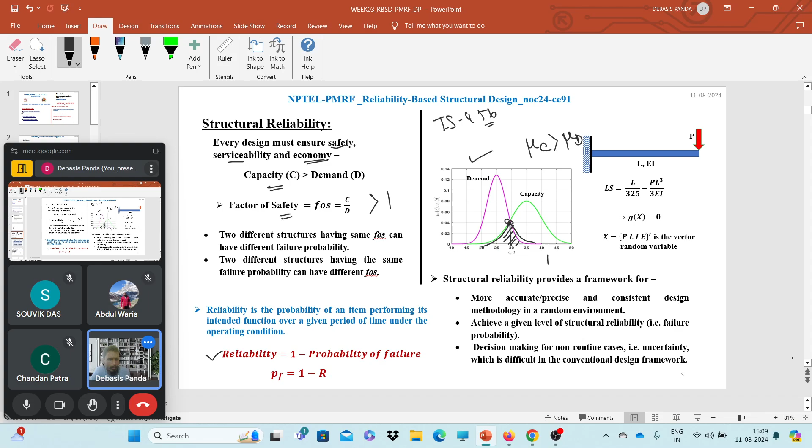If you went through your video lectures, the course instructor already explained the levels of safety checking and risk assessment formats. Level 1 deals with the deterministic approach, like what we learned up to undergrad courses. We have some codal provisions, and according to these we design. In general, what we do is overestimate the load and underestimate the capacity.

Recall that factor of 1.5 for dead load and live load combination, meaning we are overestimating it. And for the factor of safety for material, if we consider in limit state, for concrete it's 1.5, so we reduce the capacity and increase the demand, so that the uncertainties related to demand are counteracted by the reserve strength coming from the factor of safety.

In level 2 reliability, what we generally do is formulate some limit state function based on some elements. We break down the structure into element level or different component level. Then we formulate the limit state, and in the limit state, we model the uncertainties and solve for the probability of failure, and we get the reliability.

And in the third level of safety checking format, it's precise modeling. As a whole, we model the structure like FE modeling or other kinds of modeling. We will see this later on in this course.

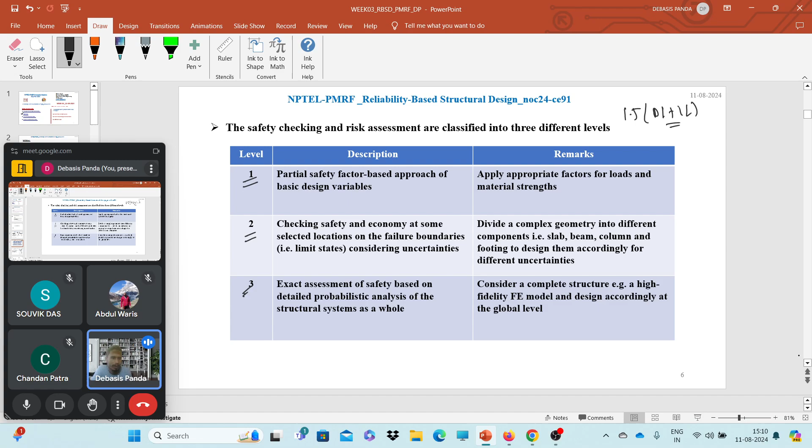First, what we need to understand is the concept of limit state, and then we can move on to how we can use the limit state to quantify the uncertainties and find out the reliability and probability of failure. So let's consider this steel beam, which has a cross section.

From the cross section we have the parameter I, from the material properties we have E and L, and an external load P is applied on the free end. So what will happen? The beam will undergo deflection.

Now, if we want to design with respect to serviceability criteria, the serviceability limit state says the maximum allowable deflection should be L by 325. That means L by 325 is nothing but your capacity.

Now, what will be the demand? Due to that external load, what will be the maximum deflection at the free end? It's PL cube by 3EI. So this is your demand.

Now, how to formulate the limit state? Limit state actually is nothing but the capacity minus demand, made equal to 0. So your limit state, Gx, contains both the capacity and demand information, right? C minus D equals 0. So for this cantilever beam problem, we can easily formulate the limit state function.

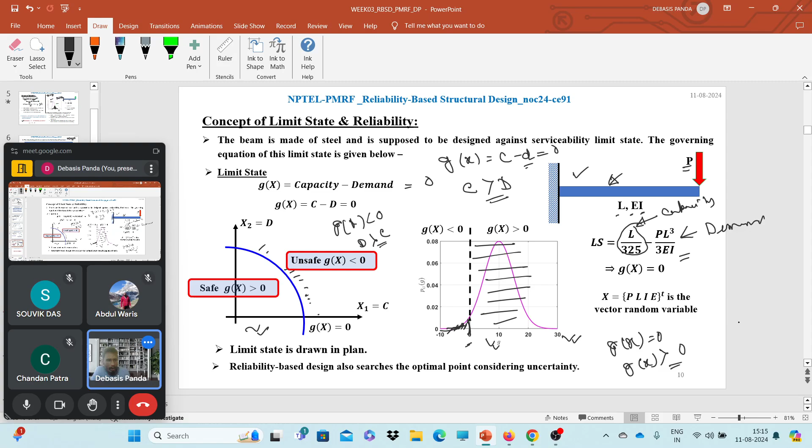So now think about it. We have the limit state, g of x equals capacity minus demand. Now, if we can find out the first two moments of the limit state, let's see if having these two moments lets us define the failure probability or the reliability. First task: let's see, if we have the two moments, we already know about the moments of the random variables. Recall the variance algebra, where if we have a function of random variables, we can expand it with the help of the Taylor series.

So if we have the limit state, first step is we have the limit state, that is c minus d equals 0. Now our task is to expand the limit state with respect to some point.

Say for example, for x star point, we expand the limit state with help of the Taylor series expansion. Now, if we consider that the reference point is mean, that may not be the case for all random variables, but let's take that mean is the reference point for our case.

So if the mean is the reference point, we can find out the mean of the limit state function as nothing but E of g(x), that means g of the mu points or mean points. And if we truncate the series up to the first order, we will get the sigma square also. So we spend time on variance of algebra, how to find out two moments. So from the variance of algebra and using Taylor series expansion, considering the mean as a reference point, we can have the first two moments.

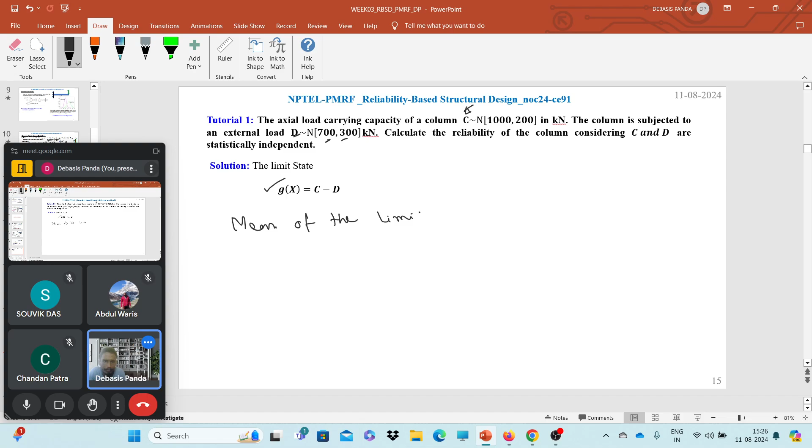So it's a linear function. What will be the mean value of the limit state? Mu g will be nothing but mu c minus mu d. The mean value of capacity and demand is already given: how much? 1000 kilonewton minus 700 kilonewton, that means 300 kilonewton.

Now what do we need to find out? We need to find out the second central moment, that means your variance. So variance of the limit state, that means sigma square, or you can directly write down standard deviation and the square root of the right hand side portion.

So it's again a linear function. What will that be? Mu c square plus mu d square - sorry, sigma c square and sigma d square. So we have the sigma values: 200 square plus 300 square.

So how much is the value you are getting? Tell me. Just give me the sigma value. Sigma will be the square root of 300 square plus 200 square. Just calculate it. Under root of 300 square - how much is coming? 360.55. Okay.

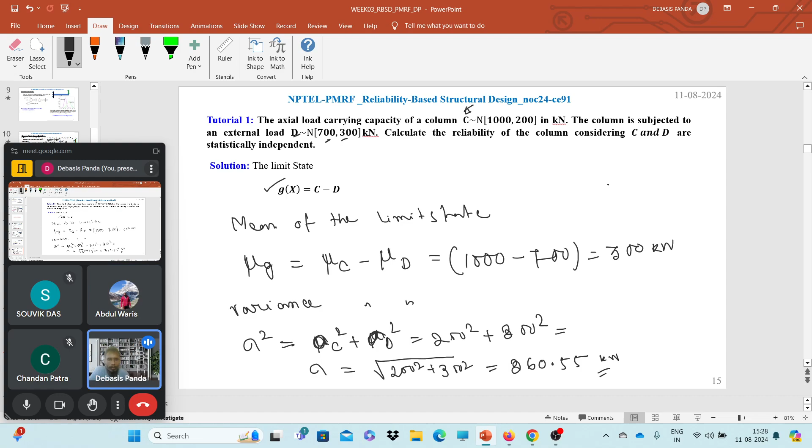200 square plus 300 square. So we have mu and sigma both. Now what do we need to do? We need to find out the beta reliability index. What will be the beta value here? Calculate it. It's nothing but your mu g by sigma g, right? So 300 divided by 360.55, and it comes to 0.83.

Now you can find out the probability of failure. Probability of failure will be nothing but phi of minus beta, that means phi of minus 0.83. Now, from where you can get the value? Look for the standard normal table, or you can directly solve it through the calculator. So let's go to the standard normal table, as we don't have a calculator within us during the final exam.

So we have to rely on the standard normal values, which will be given. So we need to look for minus 0.83, right? So here minus 0.8, and we need to go up to the point here, 0.83. So the value is nothing but how much? 0.2033, right? So from the standard normal table, we are getting the value as 0.2033.

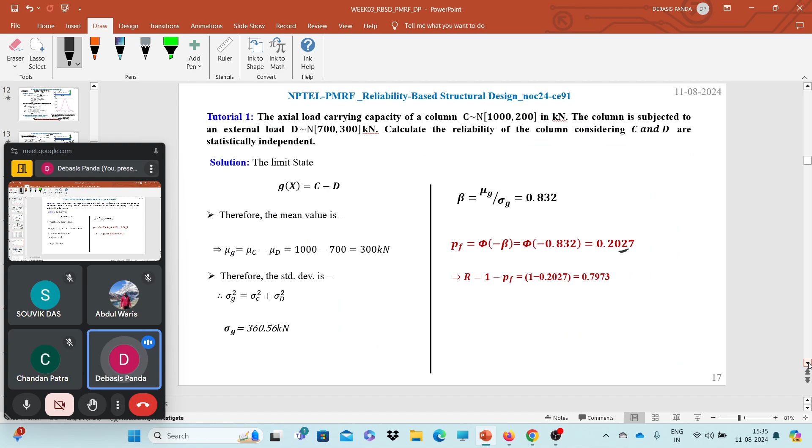Now here for this example, there was no correlation between any of the variables. If there was any correlation, then we need to also encounter that or consider that correlation within our problem.

Yes. Actually, I have a question in the next slide. Can you please move the slide? The formula for sigma square, actually. Sigma square G. We are using sigma square P, sigma square L, and sigma square E in each of the terms. But does it appear in the formula that we just saw in the previous slides?

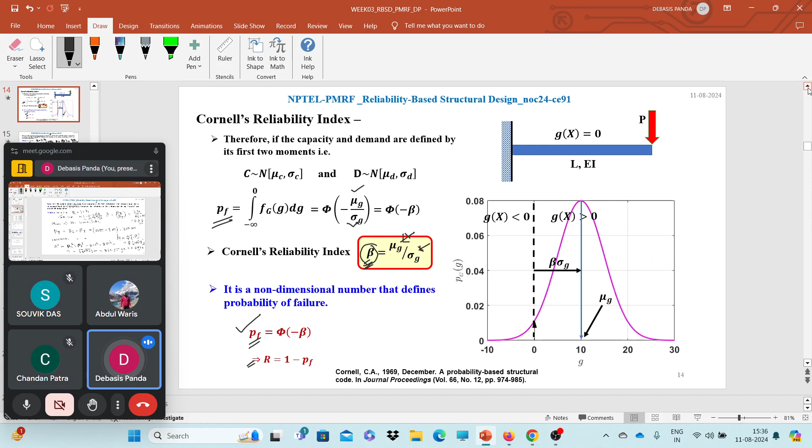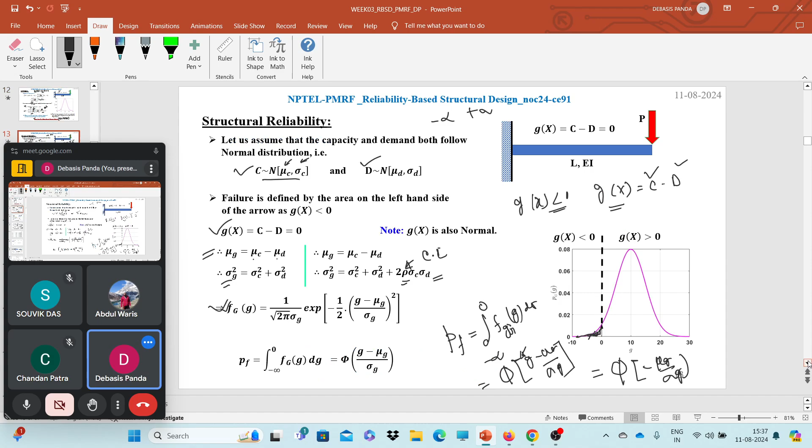Thank you. Okay, so let's solve this problem. But I suggest that you should go to those videos where we have solved the problem related to this correlation coefficients. So we will see in a minute also.

So if you put all these values here, you will get that your standard deviation will come as 0.7843. Clear? Now we have the mu value. Mu of g is equal to 3.1146, and sigma g is equal to 0.7843. Now you can calculate the beta value, it's nothing but that ratio.

3.9712. Now once we have the beta value, we can calculate the PF, probability of failure. Probability of failure will be nothing but phi of minus 3.9712.

Now check and give me the value if you are getting this value using a calculator or not, because in your standard normal table, the value of 3.97 is not provided there. Like if we go to the standard normal table, 3.4 is the last value which is provided. Behind that we will have less probability of failure. That's why. But if this kind of problem comes, then the values will be provided to you.

Now use your calculator and give me the value. Do you know how to use the calculator to find out that phi value, Abdul?

Not particularly, I use MATLAB for it usually. Yeah, you can use MATLAB. Obviously MATLAB is well and good. But if you have...

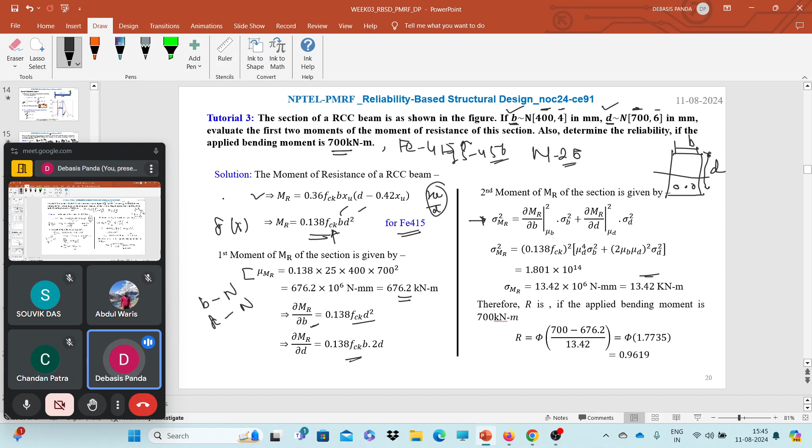Now think about it. We have b that follows normal distribution, we have d that also follows normal distribution. We have found out g of x, that means our limit state function. For the limit state function, we have found out that the mean of the limit state is that, and standard deviation of the limit state is that. Now the question asks, if the applied bending moment is 700 kilonewton, determine the reliability.

So if I want to plot that g of x, we cannot use MATLAB right now, otherwise I can plot it there. So for example, we can visualize the things here, our mean value is somewhere here, and that gives 676.2 kilonewton meter, and we have a normal distribution, that means a bell-shaped curve. And the standard deviation also we have found out.

676.2 is the mean value. We need to find out the reliability with respect to the bending moment of 700 kilonewton. So the point 700 kilonewton will lie here. What will be the reliability portion? Obviously this part, because when the value of applied bending moment is greater than 700 kilonewton, we will get the failure region.

So for this problem, what we need to do is just integrate this limit state function up to our failure criteria. That means we can easily have it from the standard normal table. So phi of 700 minus 676.2 divided by 13.42, that comes as phi of 1.7735. What is the value of phi of 1.77?

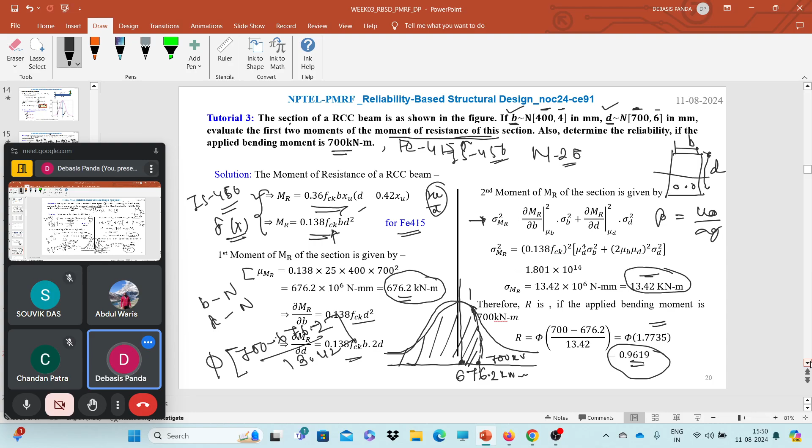Now let's solve one or two more problems. Here I have added a simple problem regarding covariance and correlation coefficients. If we have two loads, P1 and P2, applied on a beam, the mean of P1 and P2 are given. Say for example, we have a beam, P1 and P2 are given.

Now the mean of P1 and mean of P2 are also given. The question says they are correlated with a correlation coefficient equal to 0.7. Now find out the covariance.

From the properties of variance and covariance, we can conclude that the correlation coefficient between two random variables is nothing but the covariance between them divided by the standard deviation of P1 times the standard deviation of P2.

Now you have the rho value, so you can find out the covariance of P1, P2 is equal to rho 1 2 into sigma P1, sigma P2. Just put in all these values. The correlation coefficient between the two is given as 0.7.

Now the mean value and the standard deviation of P1 are also given. What was the standard deviation of P1? Variance of P1 is given as 4, so standard deviation is nothing but the square root of the variance.

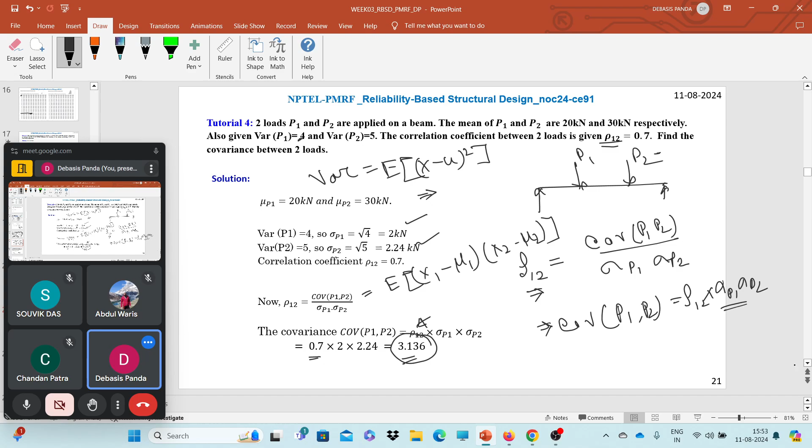2.24, right? So is the value coming to 3.136? Check it. Yeah, that is it. Okay.

So now let's solve another problem. Here, what is said - a simply supported beam. Okay, simply supported beam. Now you people solve this problem and give me the answer. A simply supported beam of length 4 meters is subjected to a self weight of UDL type.

It is given as Q1 equals this, and this follows the normal distribution with mean this and standard deviation this throughout the beam. Okay, so we have a beam, simply supported beam.

And one UDL due to the self weight is coming, right? The value is defined as Q1, and it follows normal distribution with mean this and standard deviation this. Great. And now we have, throughout the beam, a live load of point load.

Live load is given as a point load at mid span. So we have also another load Q2, which also follows normal distribution with mean and standard deviation. Great.

Now the flexural resisting moment capacity of the beam is C. Resisting capacity is given here, that is C, and that follows normal distribution of this.

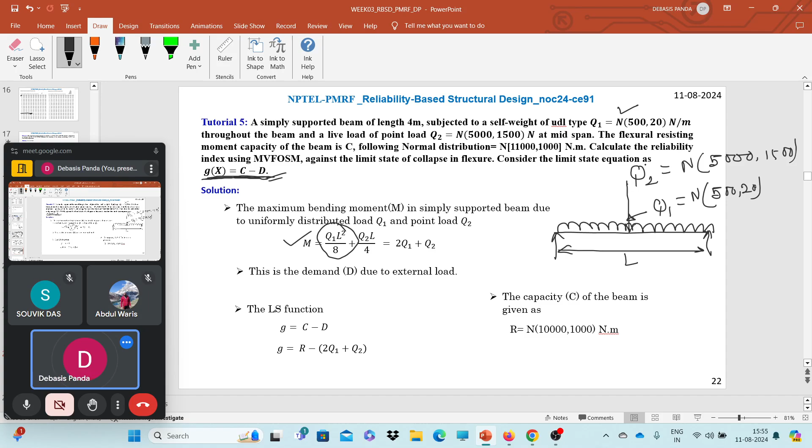Moment for the Q1 load - obviously the maximum moment due to that load will be Q1 L square by 8, and that will occur at the midpoint. Also for the point load, we will have that much of moment at the center point.

So this is the applied moment. If you solve it, you will get 2Q1 plus Q2. That means this is our... what is that?

This is our demand, yes? Due to the applied load, whatever moment we are generating within that beam, that is the demand. So we have the demand equation, and that says 2Q1 plus Q2. Now capacity, how will it change to Q1 and Q2?

The L will remain there, no? If we solve it, the L value is given, otherwise we cannot... 4 meters. Okay, fine. Yeah, got it, it's a deterministic value. So just put all these values in this and check whether this thing is coming or not. We just need to check it.

So Q1 value already given, 500 multiplied by L, that means 4 square divided by 8. What is Q2? 5000 into 4 square divided by 4 — not 4 square, it will be 4. So check and tell me if you are getting that value or not.

Don't need to provide that Q value, just simplify it with respect to L. We will solve the Q later. Are we getting 2Q1 plus Q2, or not? We are getting it. So this is our demand.

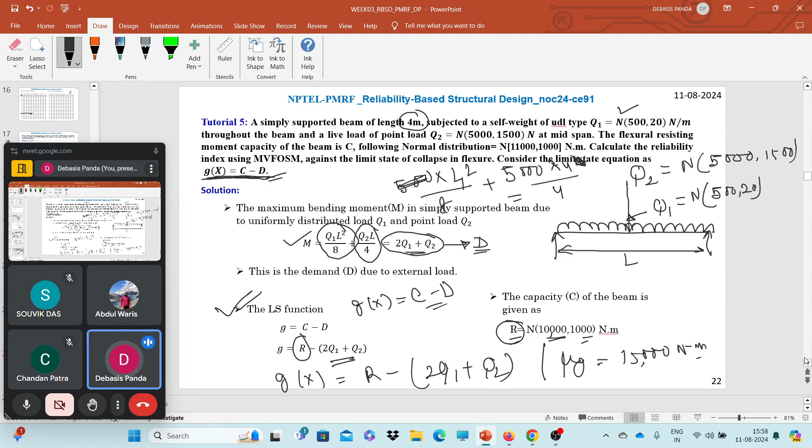Now quickly find out the sigma g. Calculate it. There is no correlation, it's a simple linear formula. Just find out the sigma g value. 1500.87.

How did you find it out? I've simply used the formula, like dow G by dow X1 kind of approach — differentiating with respect to each random variable, then squaring it and multiplying by sigma square. You just need to multiply it.

So let's see if we are getting it or not. These values are already provided. We can have the mu g, that means mu r minus this — 5 kilonewton meter. I have converted it into kilonewton meter. It will simplify it, or you can stick to Newton meter also, but at the end you should have this result.

Okay, so I'll have to recheck my results, check where I have missed the calculation, or maybe I may have missed it. So the values are given here, let's go to the slides. Okay, 500, 5,000, and 11,000.

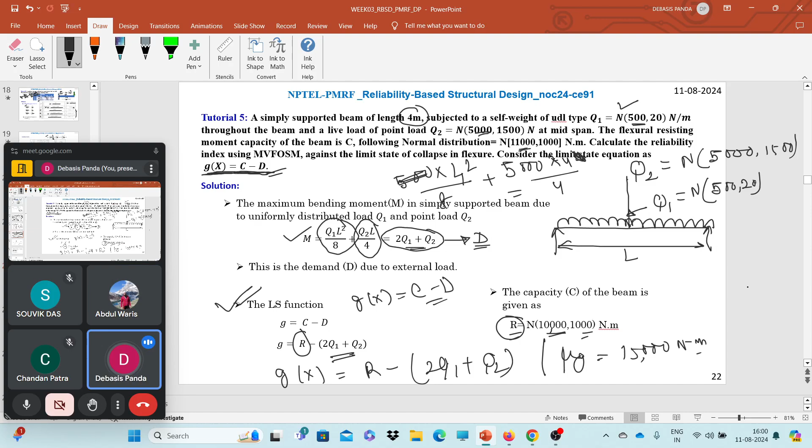If we convert them here, 0.5 Newton — Newton will be in bigger units. Just check it and tell me if you are getting that value or not. Yeah, Newton per meter is given, so already this is Newton. That means if you convert it into kilonewton, you will have 0.5. It's okay.

5,000, if you converted into that — here, okay, 5 is there, right? No problem, and mu R is 11,000. Okay, no problem with that calculation, right? 11 minus 2 into 0.5 minus 5. So it will give you — let me cross check the calculation again.

11 minus 2 into 0.5 minus 5. Yeah, okay. I've missed out the last minus Q2, I used plus over there instead. So either you will get 5 kilonewton meter or 5 into 10 cube Newton meter. Whatever, fine.

Now calculate the variance of G. Just differentiate with respect to R first, then Q1, Q2 — there is no correlation. If I differentiate with respect to R, I will get 1. If I differentiate with respect to Q1, I will get minus 2. If I differentiate with respect to Q2, I will get minus 1. It's very simple. So variance of G, just put it there — this square minus 1 square gives you 1.

Sigma R already we have, like 1. Now here del G by del Q, that is your minus 2. That means you need to square it, and Q1's sigma value, sigma Q1 times sigma Q1. Yes, this value is provided.

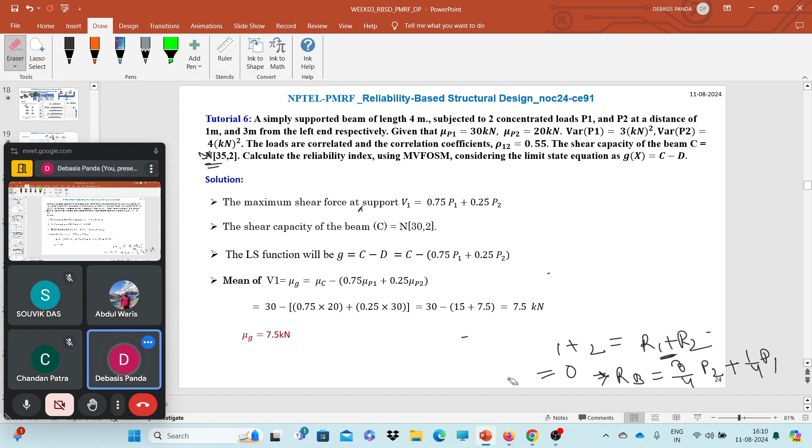Solve it and check whether my answer and your answer are matching or not. If matching, then you can directly go for the answer. Otherwise we need to figure out where the problem is.

Now tell me, if we formulate the limit state, this is our demand and this is our capacity. So G equals C minus this value. Now the value of capacity is given: the capacity follows a normal distribution with mean 35 and a standard deviation.

Now I can easily find out the mean of V1, mu C minus... maybe there's a mistake. You have multiplied 0.75 into 20, should it not be 30? Mu of P will be 30, right, and that will be 20. That's why I'm asking, just solve it.

So what is coming as mu? It will be 2.5 then. Mu will be 2.5 kilonewton.

P1 value is 3 kilonewton square. Yes, that's right, and P2 is also right. Great, so 2.5 will be there, right here. And find out the sigma value. The correlation coefficient is already also there.

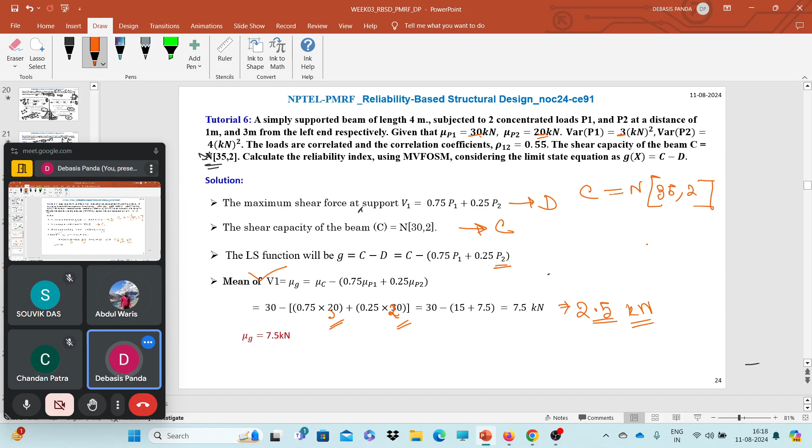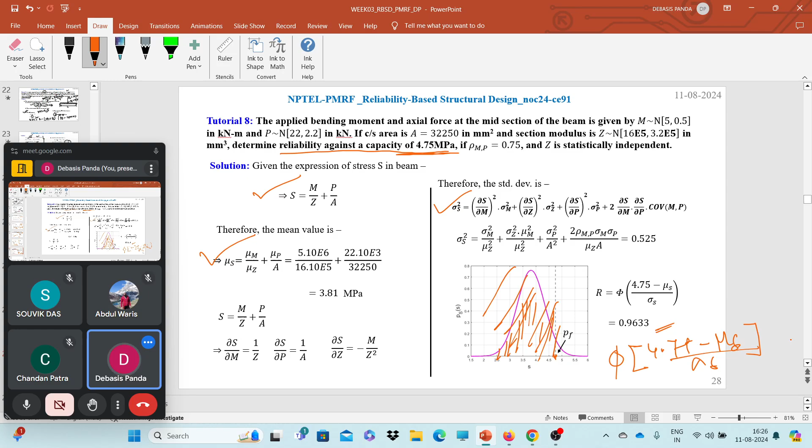So basically, till now what we have solved is how to get the probability of failure. We have seen that we can get the probability of failure if we have the non-dimensional number which we call the Cornell's reliability index, defined as the mean of the limit state divided by the standard deviation of the limit state. And the limit state we have defined as capacity minus demand.

Now, in all the questions, you have seen that the question says you should follow this format for your limit state. Now, if you don't follow this format, what will happen? We will see, and this we address as the lack of invariance problem. Now why this lack of invariance problem? I will tell you in a minute. First, check what we actually call the lack of invariance problem, right?

So let's say we have the limit state in that format, C minus D. Now if I change the format like this, that g of x equals 1 minus D by C, that means I've just divided C from here. So I can write my g of x either as 1 minus D by C, or C by D minus 1 equals to 0. These three formats, the problem will be the same, but the formation of the limit state is different.

Now, if we change the format of the limit state, our problem is still the same; we just change the format of the limit state. Now, intuitively, what comes to mind is that the reliability index should be the same for both cases. Let's see if that's the case, whether we get the reliability index in the same manner, or if the reliability index is changing or not. So let's quickly go through two important examples.

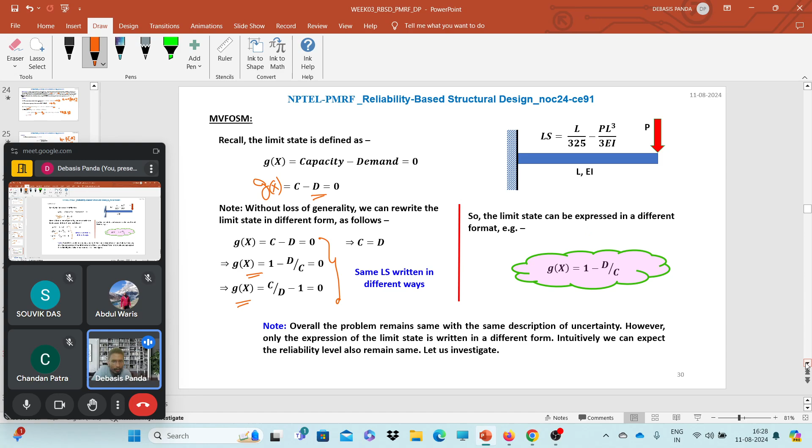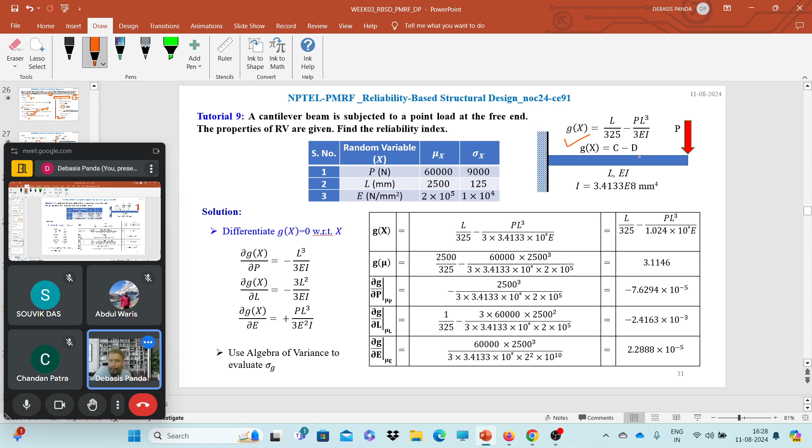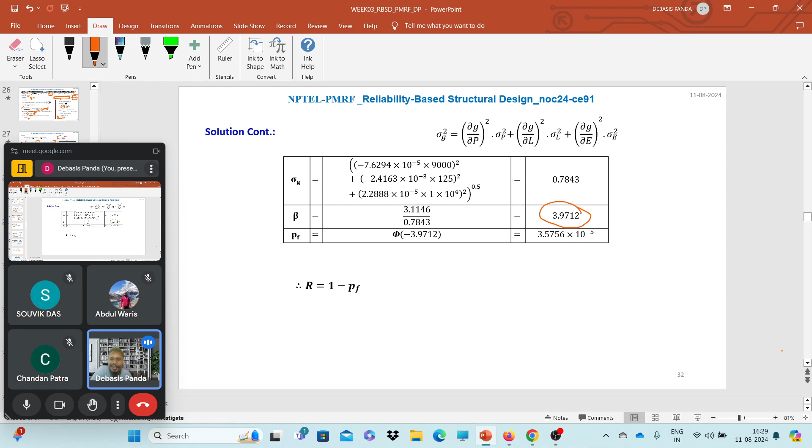We have already solved this problem, right? Where we considered the limit state in this format, C minus D, and we have seen that the beta value comes as 3.9712. We have checked the calculation on all this. We just solved this problem, yes or no? Now, if we change the format of the limit state, right...

Now I want to formulate the limit state as 1 minus d by c. Let's see what will happen. If we change the limit state again, we have that random variable associated with demand and capacity, and our limit state function was with respect to your limit state of serviceability.

That means 1 minus we will have 325 PL square by 3EI. If you solve this problem, Gx will be nothing but 1 minus that value. If we simplify, we will get the mu value. Then you need to differentiate with respect to the variables, because we have three variables, P, L, and E. So we will have three differentiations with respect to the limit state function, and the values are this.

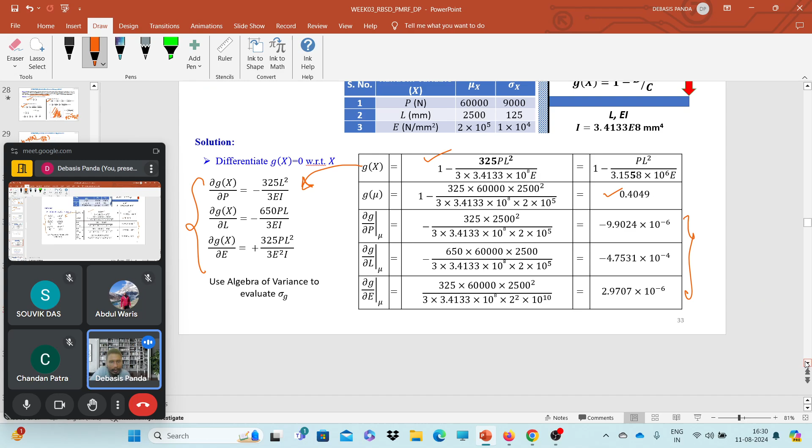You can cross check it, but first we will come to the conclusion about what we call the lack of invariance problem. So by this way, we can easily find out the value of the variance. Here, sigma g square, and that comes as this.

Now if you put all these values, you will find that beta is coming as 3.6412. On the previous problem, we have seen that beta was coming as 3.9773. For the first problem, we considered the limit state as capacity minus demand. Now for the second case, what we have changed is just the format of the limit state. We just use Gx as equals to 1 minus d by c instead of capacity minus demand. That will give you the value of beta as 3.64.

And obviously, if your beta changes, your probability of failure will change. Now this phenomena—if we change the format of the limit state, but the problem is same—for both the cases, we define the limit state with respect to the serviceable limit state criteria, where the serviceable limit is given as L by 325.

The problem is same, the random variable is same, but for two cases we'll have two reliability indices and two probability of failure criteria. Now this phenomena is called the lack of invariance problem.

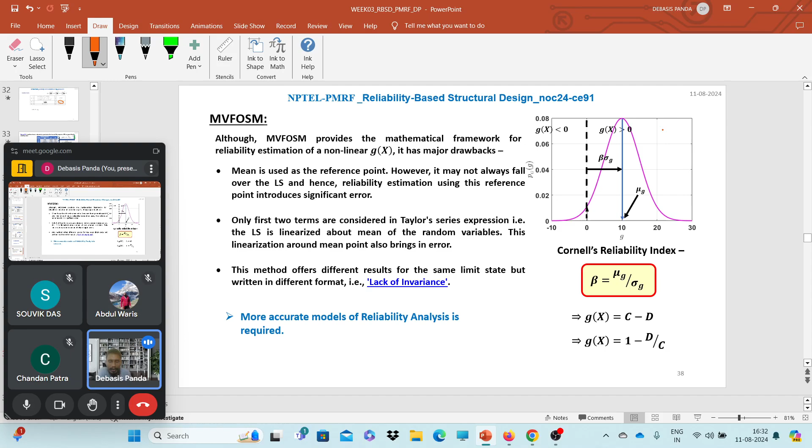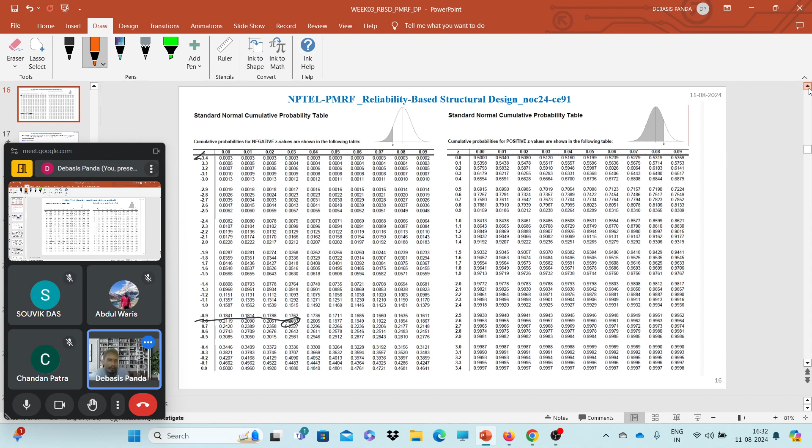Now why is that lack of invariance problem arising? That is just because of, recall, we will solve this problem too in a minute. Just recall that when we formulated the mean value first order second moment method, we actually first truncated that series at first order. First we have taken the mean as a reference point.

But for all the cases, it is not necessary that mean will be your reference point. The reference point or the reference design point will change. We'll see when we solve the second order reliability method, or the first order reliability method using the Rackwitz-Fiessler algorithm for nonlinear functions, that value will change. The design point—we need to find out the optimal design points.

So first thing, second thing—here we have truncated the series up to the first order term. So due to these two reasons, some error will occur, and that cumulative error will show up in the final results when we change this format. So that means we cannot rely on the MVFOSM method to solve all the reliability or complex reliability problems. We need to have some more accurate methodology.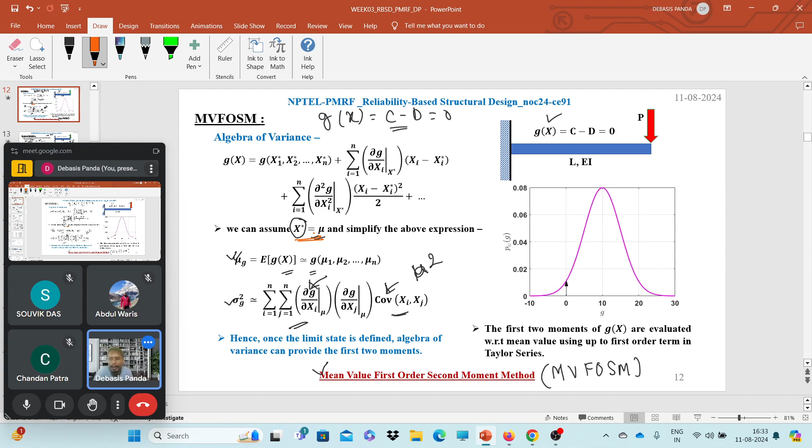Which we will see, like the first order reliability method solved using the Rackwitz algorithm, and that Cornell reliability index we will see as the Hasofer-Lind reliability index, where that lack of invariance problem will be solved. Like if we use any kind of format for the limit state, that will give us the same end result. So let's solve one problem, then we will move to the Hasofer-Lind reliability problem. Let's solve one example.

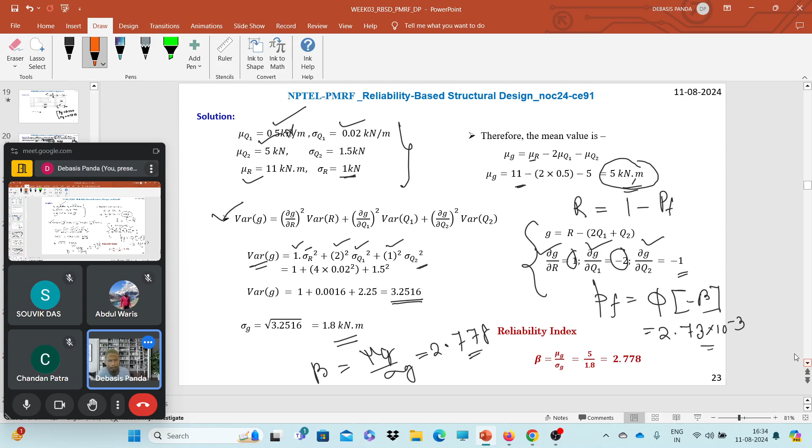Now, I hope that is clear—what is that lack of invariance problem and why it is arising. Clear? It's due to the assumptions whatever we made to get those two moments. Nothing else.

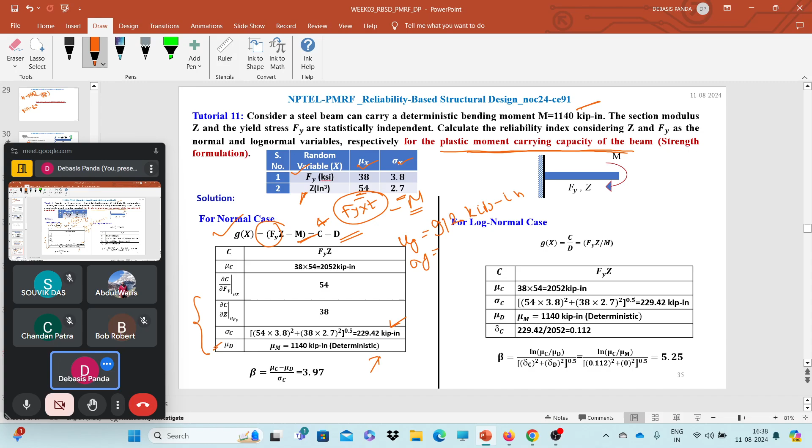Just tell me, is the beta coming as 3.97 or not. 4.00. 4.00. Yeah, 4.00, it's nearly the same as 3.97. So you can check this way also, you will get the same value, 4.00 and 3.97 are similar. If you considered a 0.0003 third order or second order term, that will nullify the difference.

So we are getting close results, and we can conclude that our estimation is okay. Now for the normal case, if we change the limit state, like here we are considering the limit state with respect to the plastic moment carrying capacity, now just change it to this format, stress formulation. That means Fy minus M by Z.

We can do it. Just divide by Z, we will have Fy minus M by Z. So Fy gives the stress, and M by Z induces bending stress due to M. Now with this format, check what beta will come for this case, and give me the value. So what will be mu g? First calculate mu g for this case, that means mu c minus mu d, and here you have mu of Fy minus mu of M by mu of Z. Make the calculation and tell me what value of mu g is coming.

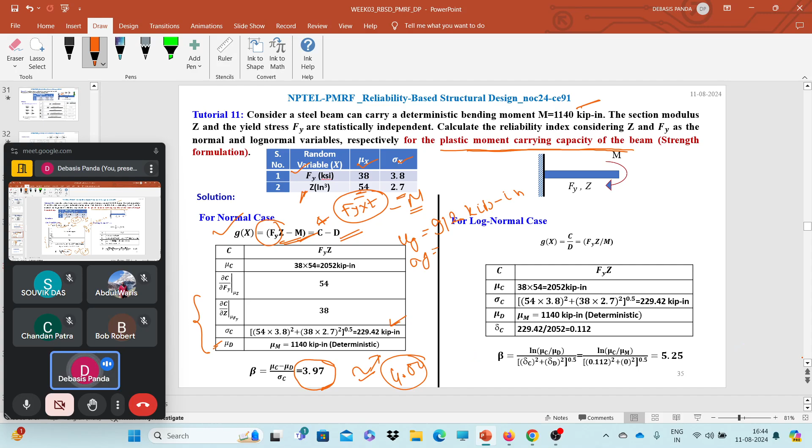So what actually we are trying to say here is, if we change the format of the limit state, here we have the limit state in that format where we get the value of beta as 3.97, or nearly equals to 4, and for this case we are considering the normal case only, we are getting 4.28 value. That means...

Today we have learned how we can find out the probability of failure using algebra of variance and Taylor series expansion, and we call this method the mean value first order second moment method, because we have already seen that we truncate the series at first order, we take the reference point as mean for the Taylor series expansion, and we have seen that the beta value and simultaneously the probability of failure will change if we change the format of the limit state, and this problem is called the lack of invariance problem.

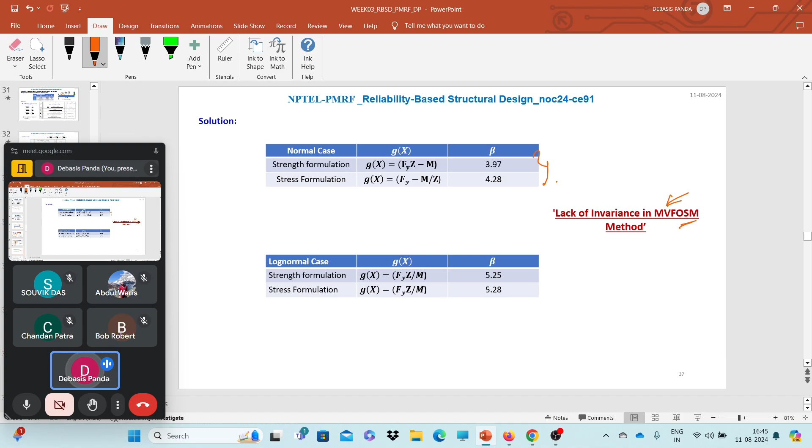Now here my question is, if you are given the problem either in this format or this one, if the limit state format is not given, you will not find the desired probability of failure, or for the different cases you will get different probability of failure. That means we cannot wholly rely on the MVFOSM process. We need to find some more reliable methods to find the reliability and probability of failure.

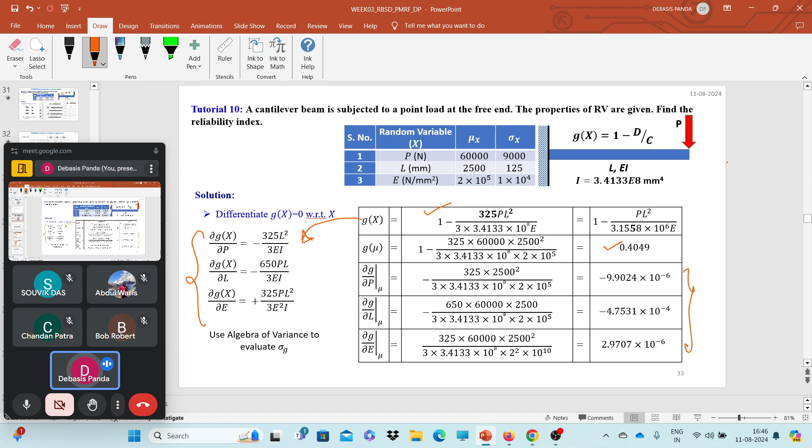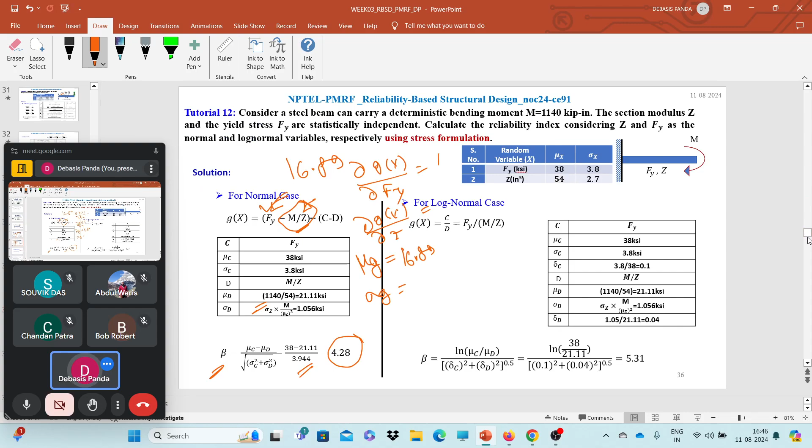So today we have learned one method about reliability, to find out the reliability index, which we call Cornell's reliability index, and then we find out the probability of failure, and we have solved a few problems regarding this. So now, to address this lack of invariance problem, actually the Hasofer-Lind reliability index comes into play.

Now actually what I have planned is that the Hasofer-Lind reliability index and the first order reliability method, the Rackwitz-Fiessler algorithm, on the next class I will fully dedicate to that Hasofer-Lind reliability index and first order reliability method. We will solve that Rackwitz algorithm, we will code it, and we will solve problems related to FORM correlated, FORM uncorrelated, and different cases like if we need to convert this into standard normal space or not, we will solve this type of problem.

So today we will not start this topic, but for example, for two or three things I want to mention here. Like if we have a limit state on the normal, that is from the definition of the limit state we know it's capacity and demand. Now if we...

transform it into standard normal space, what will happen? Nothing but, in standard normal space what we do, we just subtract the mean from that random variable and divide it with that standard deviation. So z1 and z2 we will get from here.

Now if we put that z1 and z2 value in my limit state function, capacity is equals to z1 sigma c plus mu c, and what is d here, z2 sigma d plus mu d.

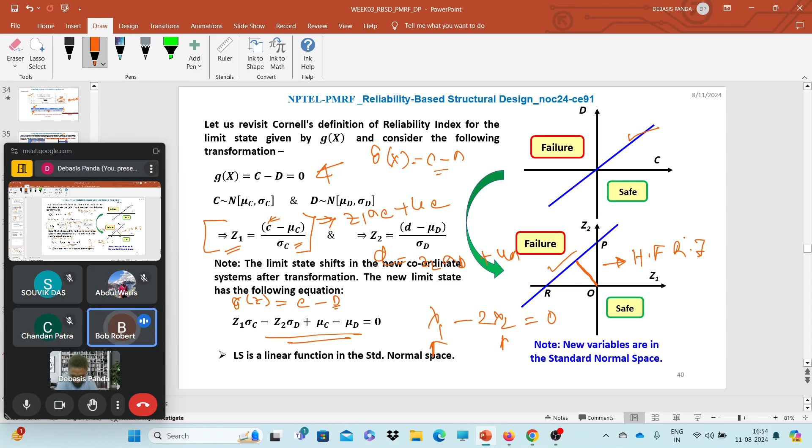I can understand. I will talk to the NPTEL team if possible - instead of 3, can we have it from 4? I mean normally 6 o'clock your time, right? You can have India time, I think it's 3 to 5 p.m.

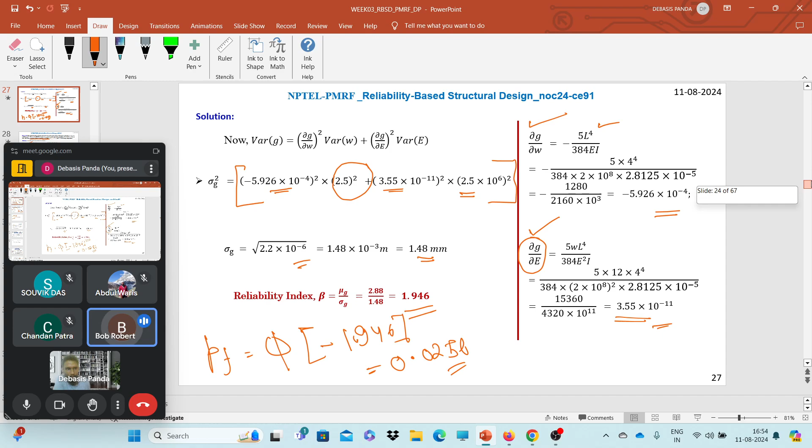Yes, but 6 o'clock at your end is 12:30 here, that is when almost every church service would have finished. But if you can shave it a little, that is fine. If you cannot, then I'll manage with it.

I have come to know that three or four of you have registered for the examination, so we can have it when you people are comfortable. We just have the sessions fully interactive.

It's very, very important because I don't want to miss the interaction, but when it comes to this, I don't know what to do. So, where are you from?

Actually Abdul, I'm from Ghana, West Africa. Okay, from Ghana, West Africa. Okay, okay, okay.

I will talk to them, but I think they will not change the slots because all the slots for the NPTELs are already decided, and an auto-generated mail has already been passed on. Still, if it is possible, I will write a mail to them. But you will have the recording videos of that session, and if you still have any doubts, you can directly mail me.

Yes, yes, yes, thank you. My number two question is, how do I get the MATLAB software? I've been looking for it, I don't know how to get it.

Okay, first thing - for this course, if you want MATLAB, I think it is inbuilt with the course. You write a mail to the NPTEL support team, they will provide you the MATLAB, and it will be activated for these sessions.

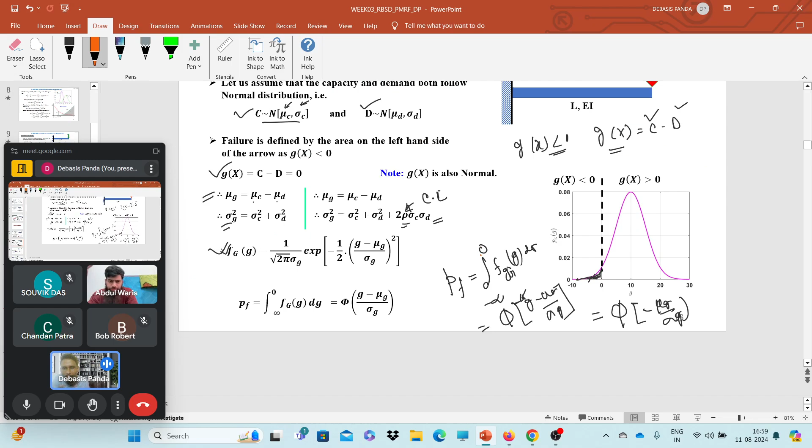You can discuss your problem, like what is the problem, how we can formulate it, for implicit functions also. Like what we have seen today, all the limit states we encountered today are in explicit form, yes or no? Yeah, all are in explicit form. Now we will also solve the implicit limit state.

If we have an implicit one, like a 10-story building, or a bridge, or a foundation part where soil-structure interaction is happening, then we will have an implicit kind of limit state. So how we can incorporate the first order reliability method to solve that implicit limit state, we will also solve, and I will give the codes if necessary.

Like what we will get in the implicit limit state, you just need to get the demand part and capacity part from a simulation code, like from ANSYS, from mechanical APDL, from SAP. So we will automate that software into MATLAB and perform the reliability analysis.

I hope it will help you. Like if we have a model, and you model it with ANSYS, and for one variable you need to incorporate randomness, you can use that formula and algorithm to automate it, so that from that software you will get the value of capacity or demand, and from this you will perform the reliability analysis.